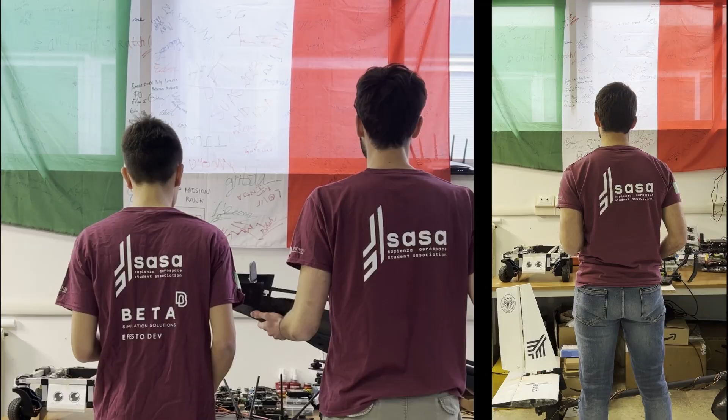Since 2009, Sapienza Flight Team is a student research project supported by University of Rome La Sapienza. This year, the development team counts 35 bachelor and master degree students from various departments of Sapienza University, including aerospace, electrical and control engineering, physics and mathematics, artificial intelligence and management, divided into 6 divisions.

The team started a long-term project in 2016 focused on the development of a custom-made autopilot, which has led to the publication of various articles and theses. The project aim was to participate in SUAS using our own autopilot instead of a commercial one. Due to the complexity of this task, during the years the team faced various technical challenges that never allowed us

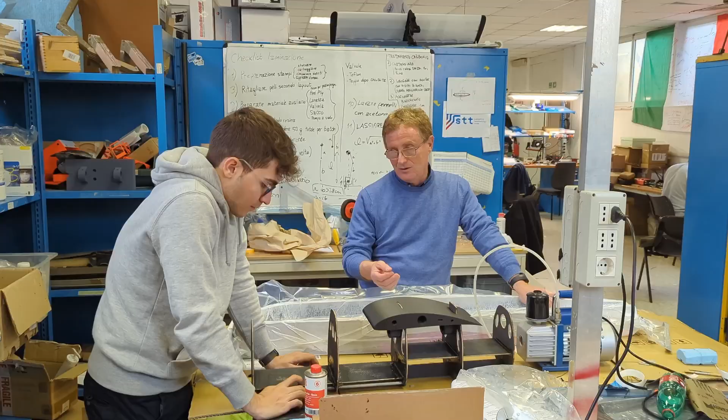to attend the competition. Furthermore, last year during the parachute drop test we experienced a major crash in March that destroyed our only aircraft. We were on the verge of giving up, since we couldn't test and fine-tune the autopilot and computer vision system, but we managed to build a new aircraft in the shortest time.

Afterwards, we spent an immense amount of time at the airfield, conducting extensive flight tests almost every day for a month and a half. This deepened our understanding of the entire system and allowed us to achieve our dream to see our autopilot fly for the first time and to bring our aircraft to the 2023 SUAS edition.

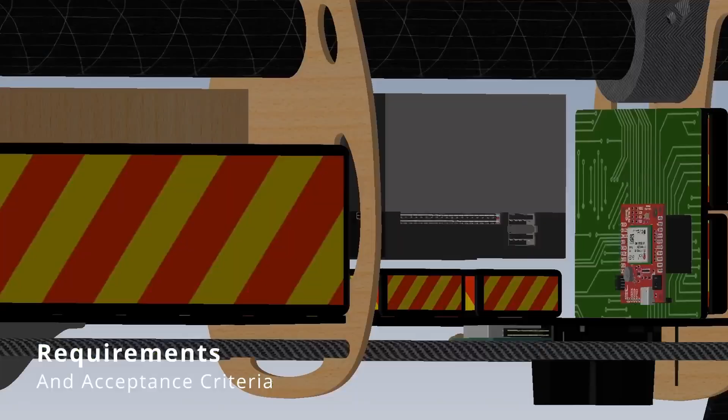P8-NB8 was specifically designed to compete in SUAS 2024. After analyzing this year's rules, we made a strategic decision to drop all 5 bottles in a single flight, in order to optimize our timeline score while maximizing the aircraft's 38 minutes range. P8-NB8 has a flight range of 22 miles at fully loaded weight, which is 32.1 pounds, thanks to two 5S 16,000 mAh lithium battery propulsion packs connected in series.

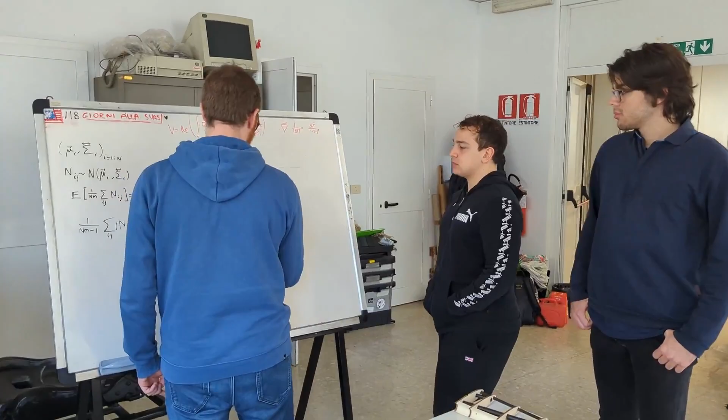It's able to perform agile maneuvers with a turn radius of less than 70 feet at a cruise speed of 48 knots, and to take off and land on a 130 feet runway. The UAV is capable of accomplishing a set of missions by keeping high safety and reliability levels, as well as high-precision autonomous flight. A multidisciplinary optimization approach was necessary to complete the system design, based on time and budget constraints, team experience, workforce, and available means.

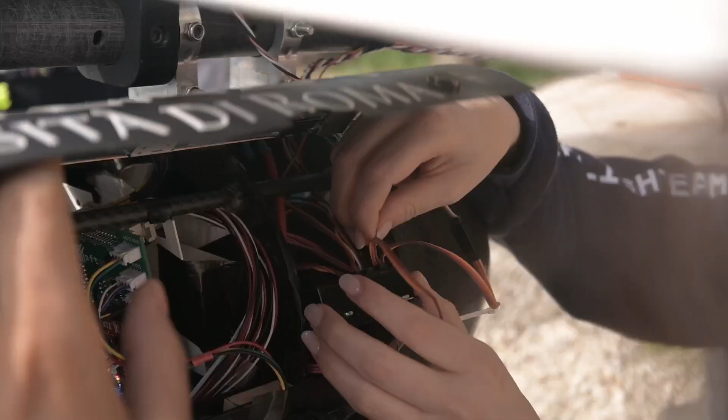After last year's challenging experience, we are raising the bar by refining our design and tackling the weaknesses exposed by last year's inexperience and time constraints. The new aircraft is focused on efficiency and reliability, and we took major focus on refining and working on the reliability of the ODLC hardware and algorithms.

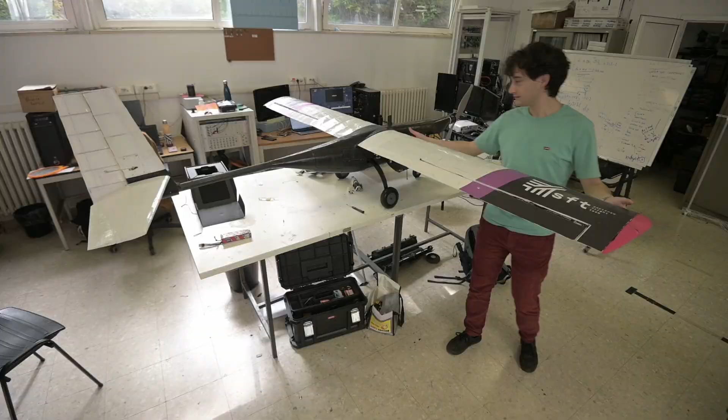P8-NB8 is a high-wing electric propeller engine aircraft, driven by a team-developed autopilot installed on an onboard computer designed and tailored specifically for the team's autopilot. A Jetson computer is used for the AI for the ODLC. A line communication between the autopilot and the AI allows the airdrop mechanism to correctly spot and reach the ground

targets with the payloads. The image acquisition setup is a Basler ace 2 industrial camera with an IMX542 global shutter sensor, which can shoot at 23 fps with 16.1 megapixel resolution with a 60mm non-distortional lens, ensuring high color accuracy. After some trials, we decided to shoot at approximately 120 feet altitude to maximize the capture area and at the same time guarantee the best recognition performance.

Our UAV mounts an NVIDIA Jetson AGX Orin, making the ODLC system run smoothly and efficiently thanks to its 64GB of video memory and powerful GPU. The ODLC process consists of several steps coexisting in a general pipeline coordinating the various processes. Compared to last year, this year's code base was focused on modularity and concurrency.

A number of multiprocessing capabilities and dynamic, object-oriented code practices were used to ensure maximum utilization of our available hardware resources, together with the possibility to hot swap different AI models for quick prototyping. The pipeline is divided into 3 sections. Picture gathering: pictures are captured using proprietary Basler camera software. They are then inserted into multiprocessing queues as NumPy arrays to be consumed by later pipeline sections.

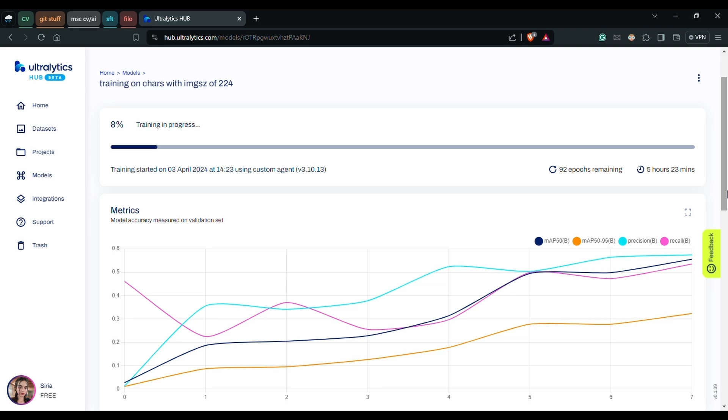An inference system. For the target detection stage, several models were considered, including YOLO-NAS, YOLOv8l, and YOLOv8m. Every model was trained on a train validation test split of the original dataset, including over 40,000 real images shot in different light conditions using both multicopter and the fixed-wing aircraft itself. Another 50,000 images come from a synthetic dataset realized in Blender to reproduce the competition airfield in the closest way possible.

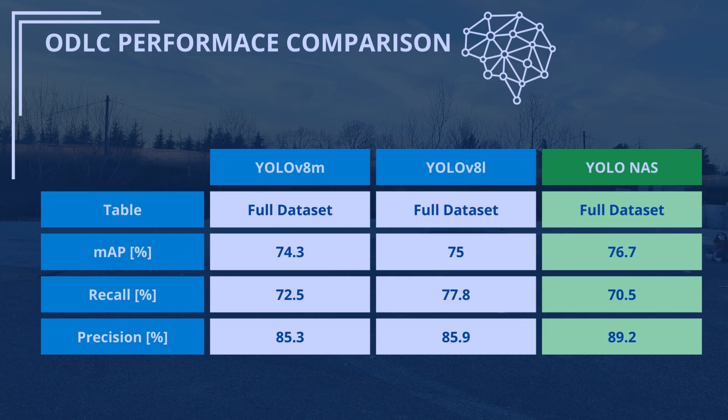YOLO-NAS attempts to detect all features at the same time, while the YOLO-V8 large and medium variants are employed as part of an ensemble of 3 different models. Each one is responsible for the detection of a separate feature: shape, color, and character. Even though it seems less convenient from a computational point of view, this choice actually increases scalability in the model by reducing the number of total classes, resulting in a more dense dataset overall.

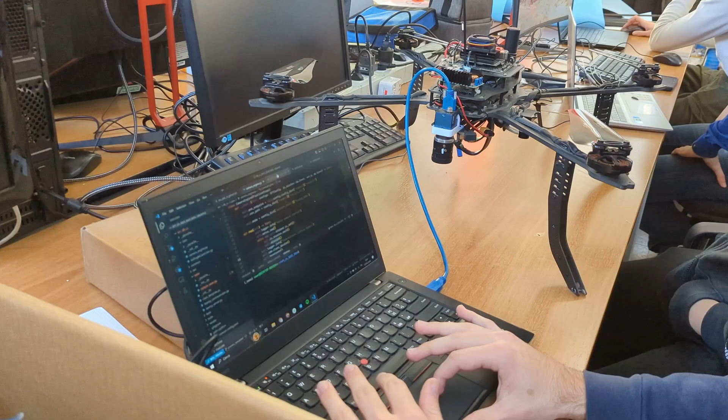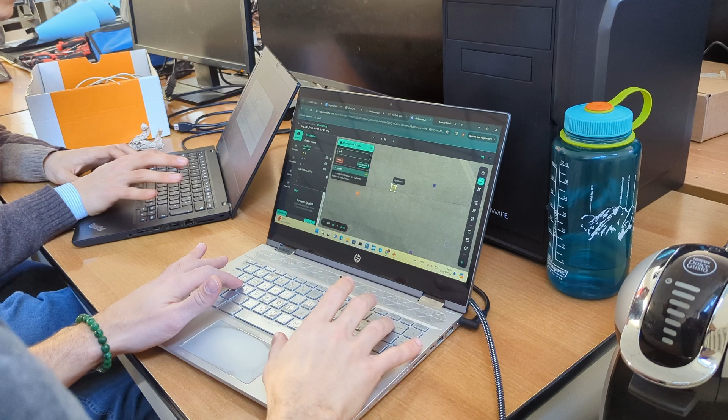Specifically, shapes are detected by YOLO-V8. The resulting patches are then fed to YOLO models for color detection, and to a fine-tuned EfficientNet S classifier for character detection. Decision system observes target recognition. The decision system steps into determining the actual drop locations of the payloads. The confidence level extracted from YOLO combined with information about the flight targets that are communicated at the flight line help the decision system to refine the detected targets into more confident predictions.

Geolocation accurately determines the location of the target by recovering the perspective projection of the aerial photograph. This process requires considering variables such as the position, attitude, and altitude of the UAV and the positions of the camera's focus relative to it. As a result of numerous tests, the team observed that thanks to the chosen optics, lens deformation is not significant compared to measurement errors.

In addition, Geolocation provides estimates of measurement errors, exploiting methodologies such as Monte Carlo and maximum likelihood estimations. These techniques allow us to compare elliptical confidence regions built on each sample of the same target. Tests validate the mathematical model by confirming an empirical error within 16 inches. Thanks to the accuracy and robustness of our system, no additional operators are used for the ODLC tasks. All the process is fully autonomous.

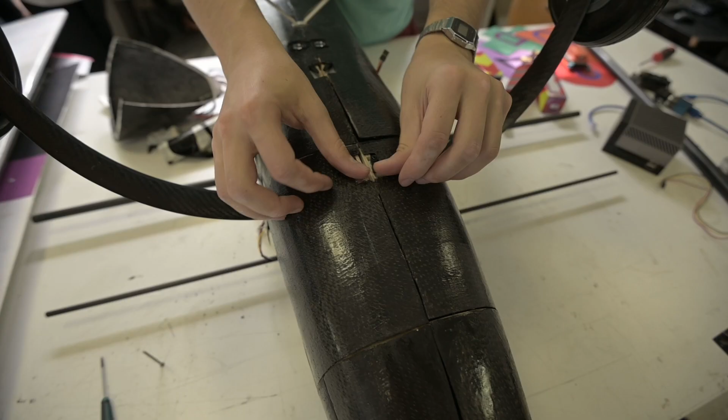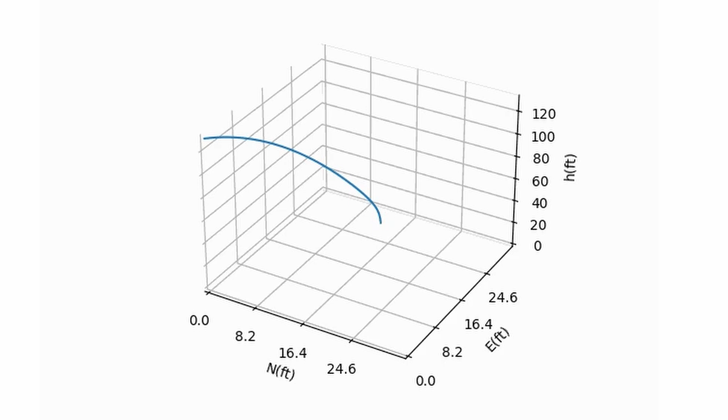The fuselage has been designed to carry on the inside all the 5 payloads in one single flight, and the release mechanism is managed directly by the onboard computer. Dropping point. To ensure accurate payload release, we rely on a 6 degrees of freedom effective mathematical model that integrates lateral and vertical drag coefficients, considering wind and cylindrical symmetry of the payload. The release point is determined by statistical simulations, taking into account the landing error, ensuring maximum accuracy and mission execution.

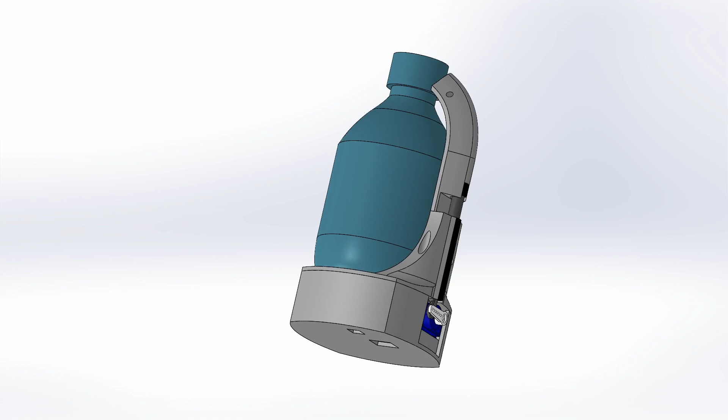The payload. Hardware-wise, the payload system includes a lightweight and easy-to-remove structure that houses the bottle, a safeguard, a latch on the side for the parachute, and compact onboard electronics, which include a barometric sensor and an ATtiny85 microcontroller that manages the parachute release. The chip-run software coordinates the payload through 3 phases: standby, activation, and execution. During the first one, the payload is inside the UAV, and the safeguard is attached to it.

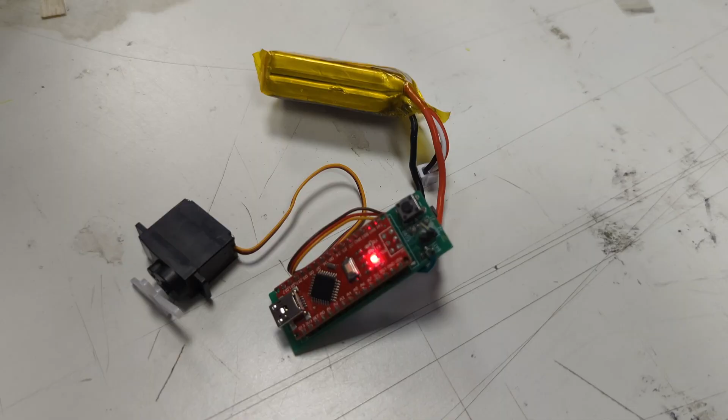When the safeguard is removed using a servo on the aircraft by a command on the autopilot, the ATtiny85 enters the activation phase and monitors the altitude through the barometric sensor. When the predetermined altitude is reached, the microcontroller goes into the execution phase and activates the latch for controlled release of the parachute, ensuring precise and secure control during transport and release of the payload. This mechanism dramatically increases the drop precision with average wind at an altitude of 115 feet. The estimated average landing error is about 23 feet, while releasing the parachute at 15 feet, the error reduces to 12 feet, safely inside the acceptance radius.

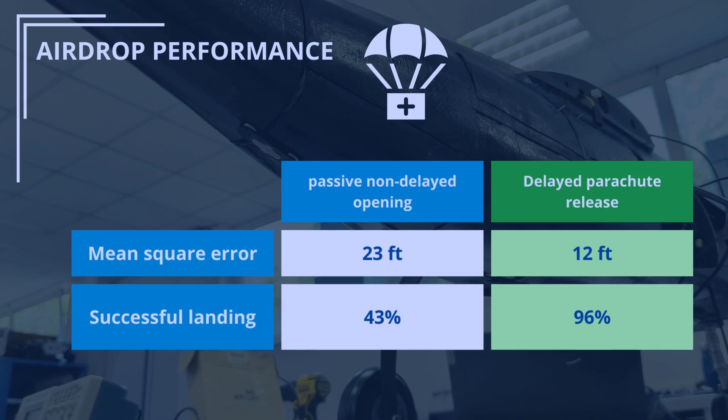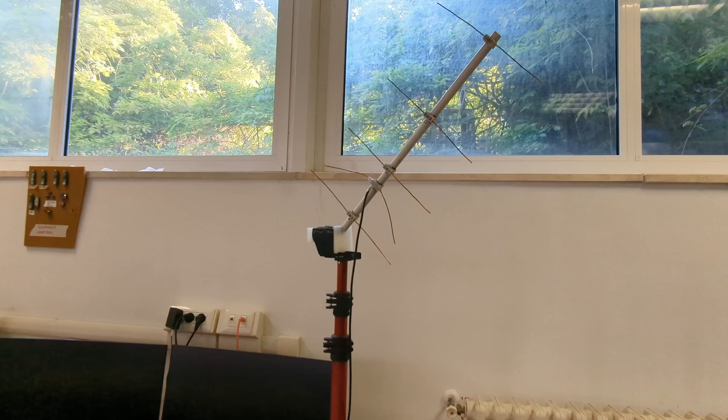The communication system between UAV and ground control station consists of 2 RFD900X US modules with a 3 dBi omnidirectional antenna on the drone and a custom 10 dBi Yagi antenna on the ground, mounted on a fixed tripod near the GCS. For redundancy, there is a second link via Futaba 2.4 GHz S-bus protocol receiver that connects the drone to the remote controller and the GCS, manned by the safety pilot. This is activated in case of critical failures of the autopilot system.

The ground station consists of 1 laptop and a radio modem. Communication with the autopilot is based on the MAVLink protocol. The front-end interface is a modified version of QGroundControl that displays mission plans and boundaries, performs telemetry, and transmits command and control messages.

The use of RFD900X US modules assures a continuous, reliable, and constant data link during the entire length of the mission, tested for twice the competition maximum distance. Furthermore, they are FAA standards compliant. All the tests for the antenna performances were carried out at our airfield in situations similar to those of the competition, with other UAVs flying with various frequencies.

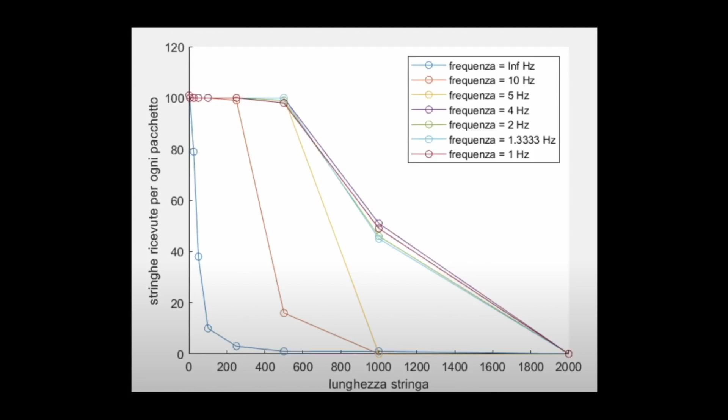The used evaluation metrics are the RSSI, Received Signal Strength Indicator, and the number of received packets. Both of them can be measured using the RFD Tools software. Different trials have been made with different values of data rates, transmitted power, and distances.

Communication to the Jetson during setup time is done through a 2.4 GHz link directly to a computer. In addition, a 2.4 GHz FAA ID sender telemetry is installed on the aircraft to comply with US regulations. In case of emergency, the safety pilot uses a Futaba radio controller, which guarantees seamless and continuous communication.

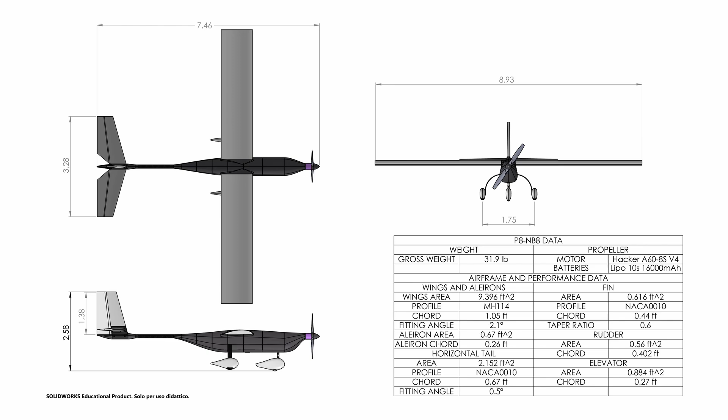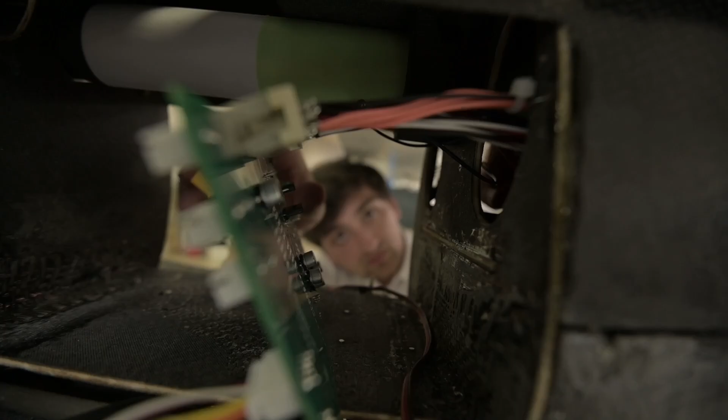Following last year's development and thanks to new rules including smaller bottles, the challenge was to improve the aircraft's performance and maneuverability. The new P8-NB8 aircraft is based on a similar design concept as the previous INEA aircraft, but is equipped with a fuselage made with composite materials, which dramatically increases aerodynamic efficiency and reduces its weight, keeping it spacious at the same time, thanks to careful cable management and better space allocation. In addition, after CFD optimizations, the tailplane has been completely revised.

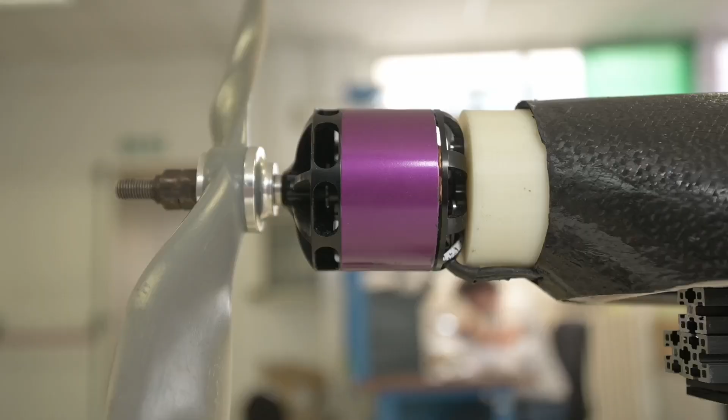P8-NB8 is a fixed-wing aircraft developed along a main carbon fiber boom. This configuration allows agility in disassembling and assembling operations and guarantees good modularity and easy replacement of damaged components. The aircraft is propelled by a Hacker A60 electric motor mounting a 21 by 13 WE APC propeller.

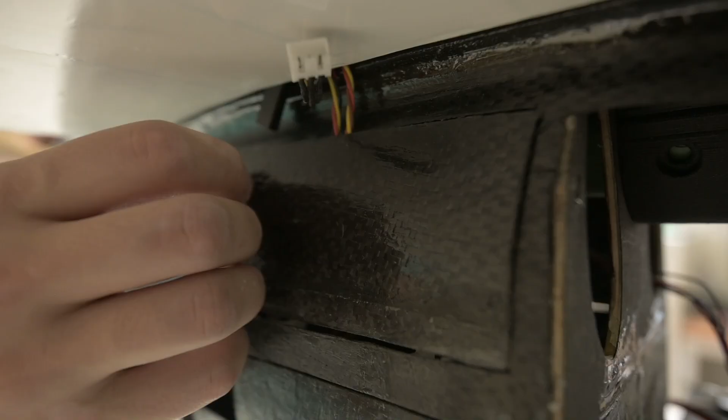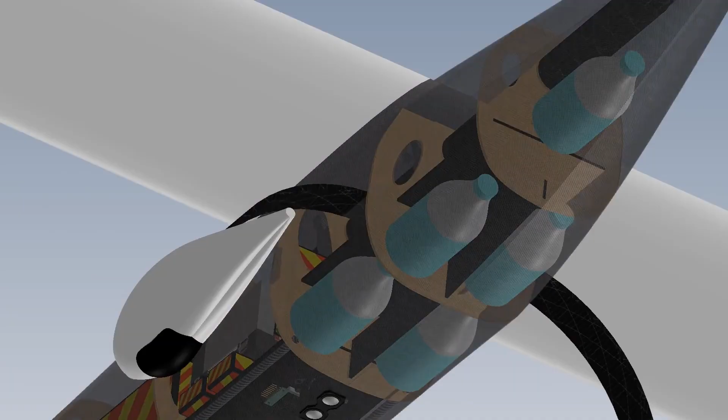The fuselage is designed to maximize space optimization, achieving convenience in accessing electronics for maintenance and quick battery replacement, reducing setup time. The front nosepiece houses the ODLC equipment, while the rear is dedicated to payload release. The undercarriage system is configured with a front wheel and a rear main landing gear in order to implement the autonomous takeoff and landing, since a tail-dragger configuration is too difficult to land by an autopilot.

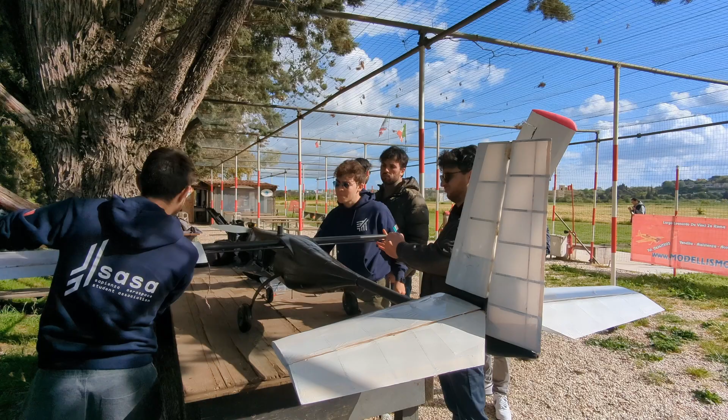To improve aerodynamic performances, the fuselage section area was minimized and the main boom was incorporated inside the fuselage. Wings are attached to the main boom with a bayonet fitting mechanism, and their support is 3D printed using carbon fiber reinforced PA.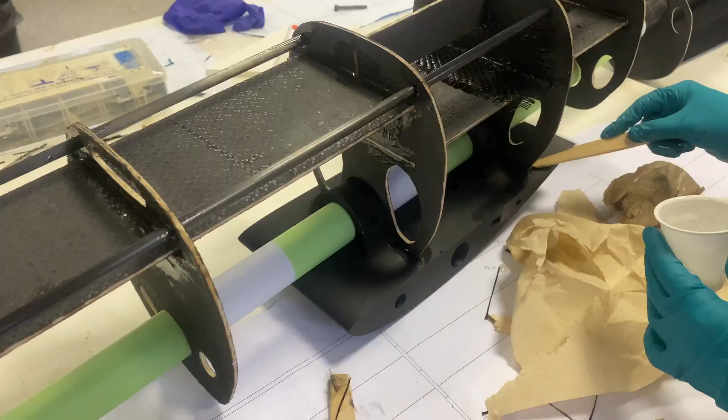The new fuselage design incorporates a telescopic tube as its primary structural element, facilitating easy disassembling by allowing the boom to slide within it. Composite ribs with a plywood core coated in carbon fiber maintain the fuselage in shape, while the fuselage coverage consists of composite material with 2 layers of carbon fiber. The molding process has been carried out using 2 semi-molds created by a resin 3D printer.

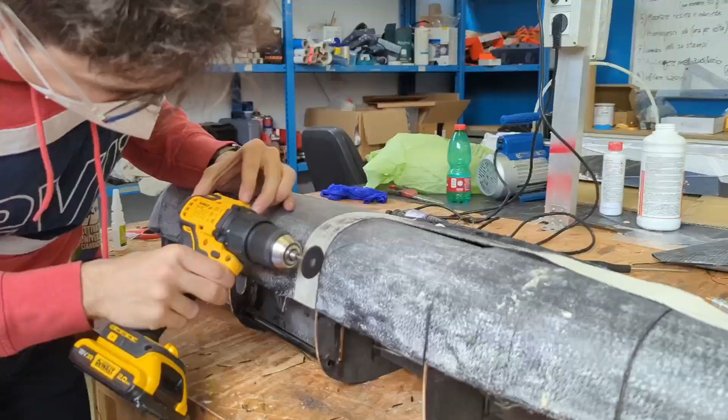Accessibility of this system is ensured through a series of hatches cut into the fuselage, which also allow payload dropping. 5 hatches, each equipped with a servo motor, keep the release bay locked until activated. This allows payload release, after which a spring mechanism closes the bay. Extensive flight testing with strong wind and bearing payloads confirmed good performance, with a 38 minutes autonomy and great robustness, testing the limits by intentionally performing various hard landings, stall tests, and up to 4G maneuvers.

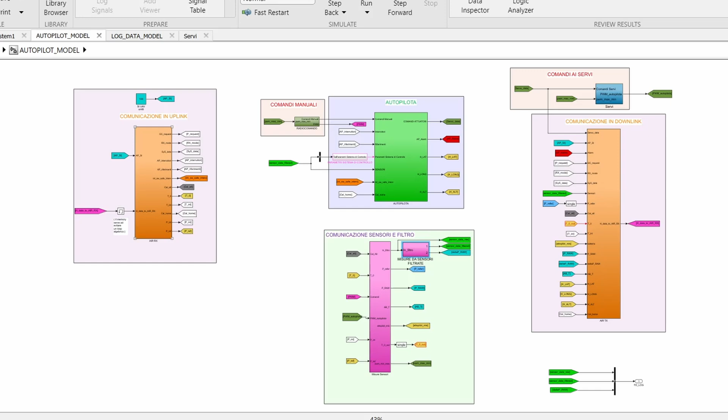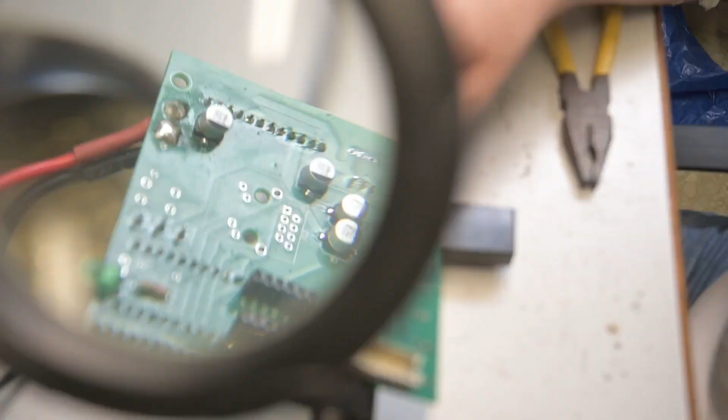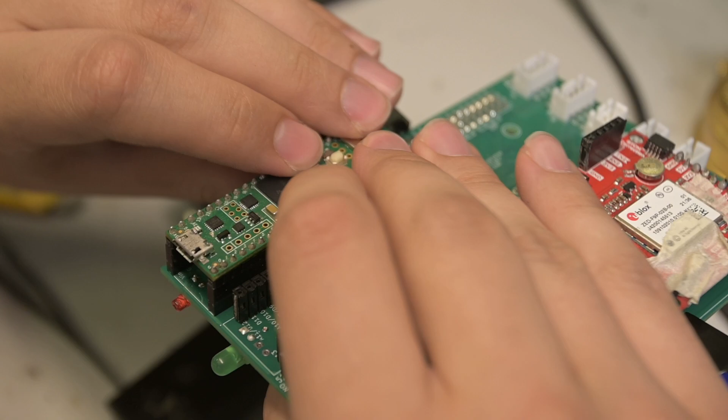The UAV pulsing heart is our in-house developed onboard computer. It's based on a custom PCB that manages the power supply of the OBC, the antennas and all the servos, and holds the communication between the sensors and a Teensy 4.1 microcontroller that runs the autopilot itself and an Arduino Micro that carries out some additional computations from some sensors and sends them to the autopilot itself.

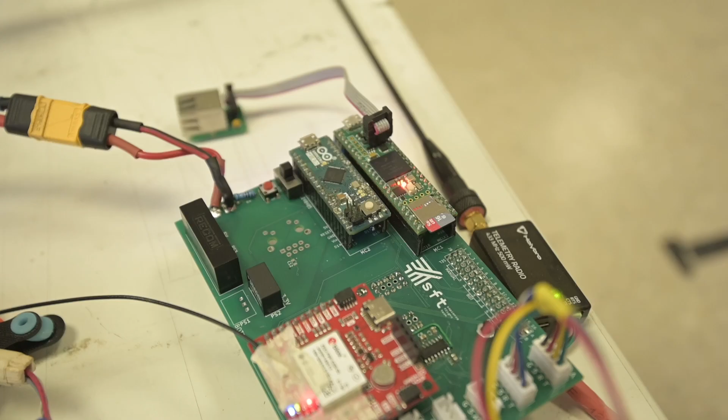The avionics sensors include an Xsens MTi-680G AHRS for attitude, a barometric altimeter, one pitot, an RTK u-blox F9P GPS, a lidar altimeter, and a current sensor to accurately estimate the main motor and avionics battery's state of charge. As every other part of our UAV, the electronics is designed to be fully modular and compact, ensuring fast and straightforward maintenance.

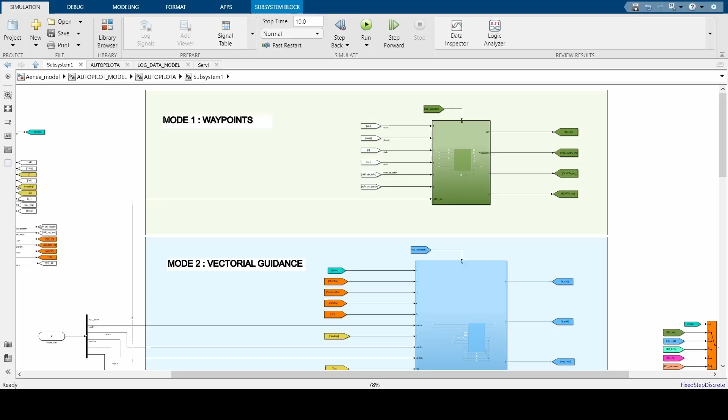Flight management system includes 5 flight modes. Among these, the vector guidance is the primary testing mode used to tune the control loops. The waypoint navigation mode is based on an advanced trajectory generation and path following algorithm. It generates an optimal trajectory taking into account aircraft performances and geofence limits, updating the flight path in real time in case of obstacles detection.

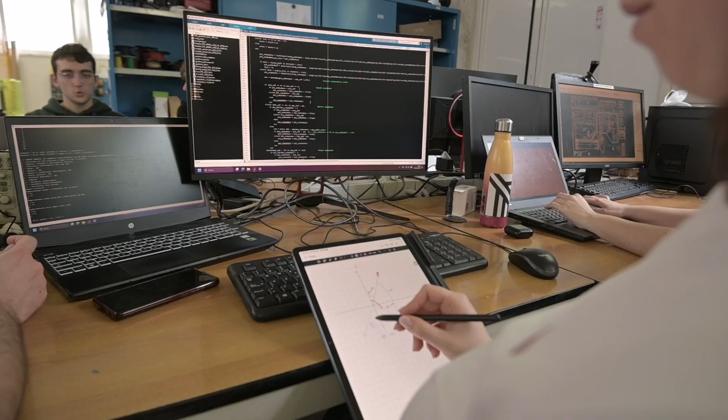The autopilot is also able to perform the automatic takeoff and landing phases. Furthermore, waypoint navigation has been integrated with other modes required in critical conditions, like return to land and flight termination. The activation logic of these modes is signal and battery dependent. Once engaged, the RTL mode leads the drone to the selected position, then switches to automatic or manual landing.

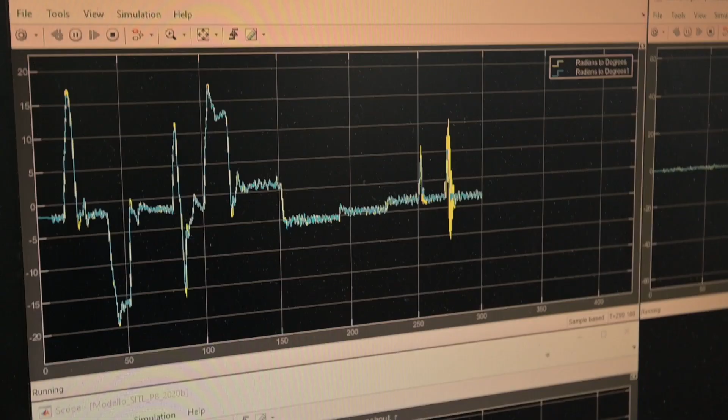The flight termination mode forces the aircraft in the following setup: throttle closed, full up elevator, full right rudder, full right aileron. Tuning. Numerous modifications have been made to make the aircraft's control system more robust, accurate and reactive than last year.

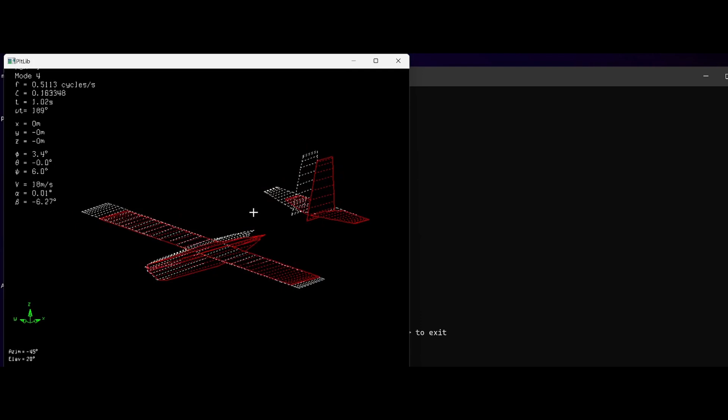To tune and safely test the autopilot control loops and modes, a parallel Simulink model dedicated to the software-in-the-loop simulation was developed. It is a complete digital twin of the aircraft that allows the simulation of sensors outputs, including noise, the rotation of the aerodynamic control surfaces, and dynamic behavior of the UAV. It exploits a sophisticated mathematical model of the aircraft obtained through Athena Vortex Lattice software and validated with several flight tests. The flight control system tuning has been validated through vectorial guidance data obtained through test flights and simulations.

In addition, software-in-the-loop simulations of waypoint navigation have been run to tune the navigation parameters in order to improve the accuracy when reaching waypoints. Real-life testing of the autopilot was conducted by performing waypoint navigations. Missions were planned from ground control stations, streaming the desired waypoint to the onboard computer. These tests have shown that the plane is capable of following an articulated trajectory within a 95% confidence interval of a width of 15.6 feet on every waypoint.

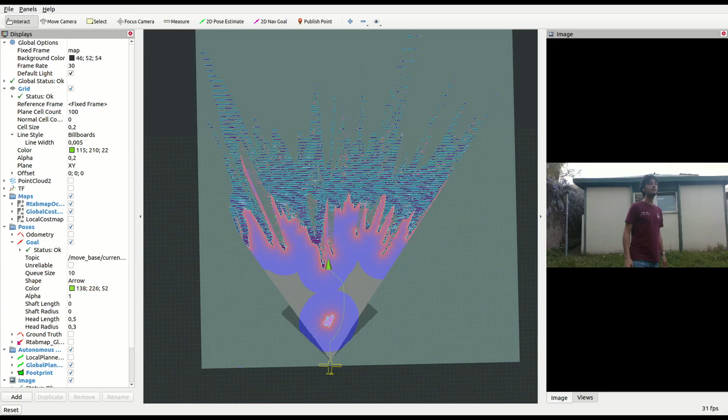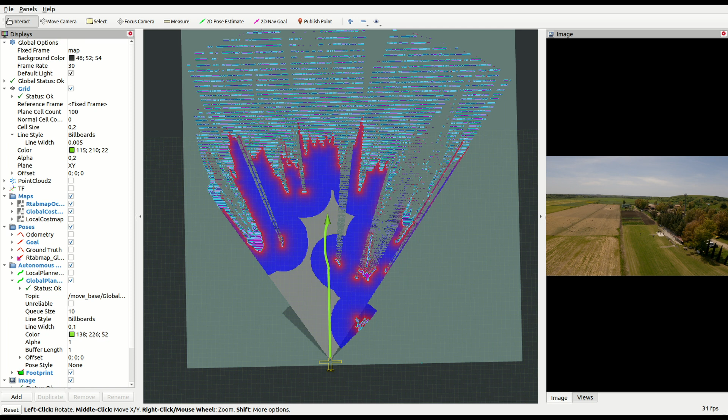In order to avoid collision with other UAVs, obstacle detection is realized through a ZED mini stereo camera connected to the Jetson AGX with a field of view of 82 degrees in front of the aircraft. This allows the identification of long-range objects larger than 15 centimeters with accurate depth perception at high FPS. Thanks to the ROS framework that runs on the Jetson, the stereo camera is capable of generating a high-frequency point cloud through which it is possible to determine the presence of dynamic obstacles and their positions.

Once an object is individuated in flight, a custom algorithm written in Simulink and C computes an alternative path generating 2 new intermediary waypoints, sent through the OBC using Ethernet protocol. The autopilot then performs an evasive maneuver updating its flight path. After software-in-the-loop simulation tuning, we are able to optimize the maneuver and achieve good stability.

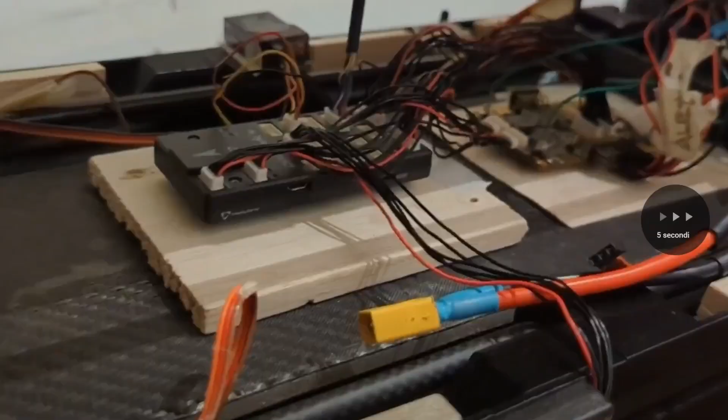We attempted 9 obstacle avoidance maneuvers in many conditions during flights by positioning a slow-moving quadricopter in front of the aircraft path, simulating a competition scenario. In all of them, the aircraft was able to avoid collision by staying at a minimum distance of 15 feet from the UAV. In case of a potential collision with other UAV approaching from a direction other than the front of the plane, the safety pilot is always ready to steer the aircraft away from dangerous situations.

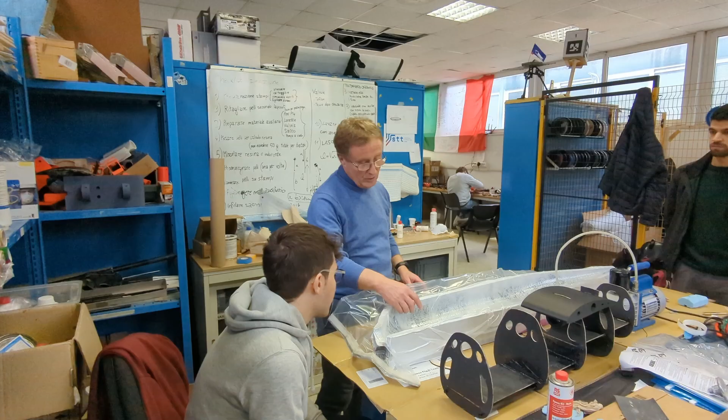The possibility of using Pixhawk and ArduPilot as an alternative to the team's one was considered and tested. Despite the convenience of a commercial autopilot, a custom one tailored specifically for P8-NB8 assures high versatility in accordance with aircraft's performance and mission requirements, allowing at the same time possible software expansions in the future. Furthermore, its extreme modularity makes repair cheaper. Beyond the valuable learning experience for our students, this project could serve as a springboard for future development of our system, potentially leading to commercial production.

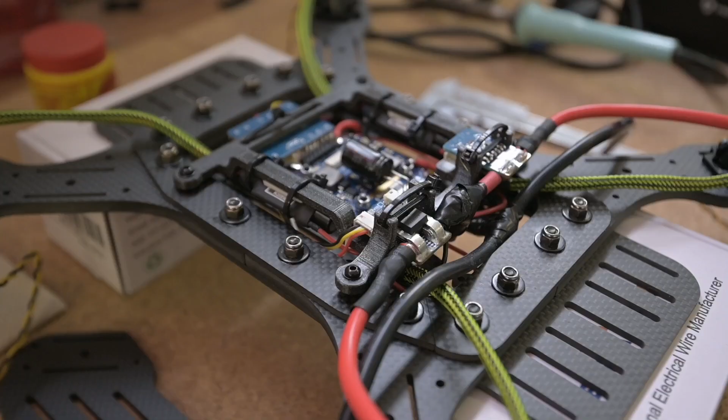Regarding the UAV design choice, a multi-rotor configuration was taken into consideration and tested due to its capability of delivering payload while hovering. However, we ultimately chose a fixed-wing design because of its several advantages, including longer range, faster travel times, and increased loading capabilities.

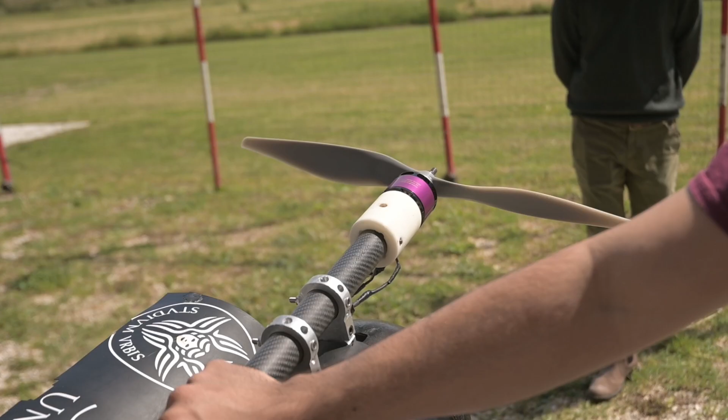These advantages make it easier to meet mission time constraints and open doors for future development of long-range air delivery capabilities, similar to those employed by many air delivery companies. We opted to discard the use of a 2-axis gimbal after testing revealed minimal impact of airplane roll on photo distortion, motion blur, and captured area, allowing us to reduce weight and to simplify geolocation by exploiting the more precise attitude data from the aircraft's AHRS.

Regarding the airdrop system, we explored various concepts, ultimately selecting a delayed parachute airdrop system. The precision of a passive approach of a normal parachute was found to be strongly susceptible to wind gusts, not guaranteeing a stable drop location precision.

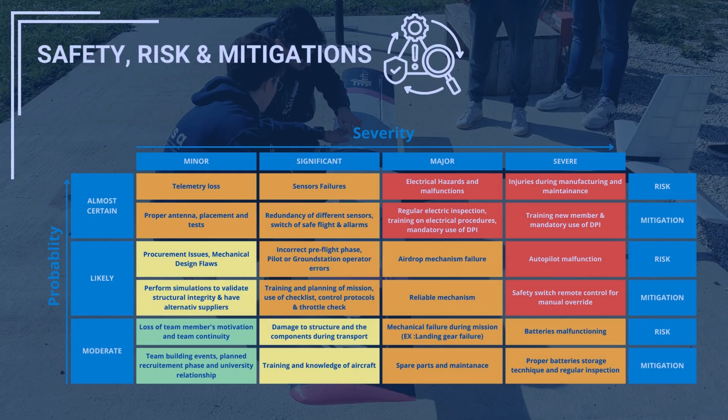We divided risks in 4 different categories based on the phase of the year: development, manufacturing, test phase, and competition. Development. To minimize the complexity of such a project, we worked on a comprehensive management plan that outlines clear milestones, identifies potential delays, and outlines contingency plans to mitigate them. We also implemented a robust plan to ensure timely acquisition of all necessary materials.

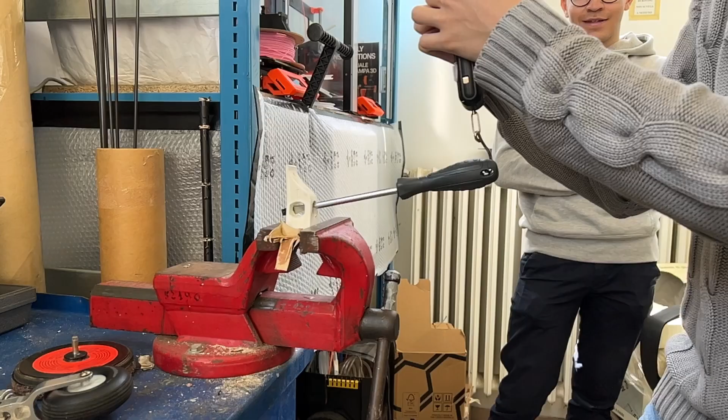The entire project is in fact focused on modularity on many different levels to ensure great flexibility and reduce costs. Moreover, having 2 similar aircraft as a backup this year allowed us to maximize testing campaigns of the various departments and stress test all components. Manufacturing. To minimize or eliminate risks for team members and vehicle components, several safety measures have been put in place, and all team members have been provided with safety courses and equipment to minimize injuries during manufacturing processes and tests.

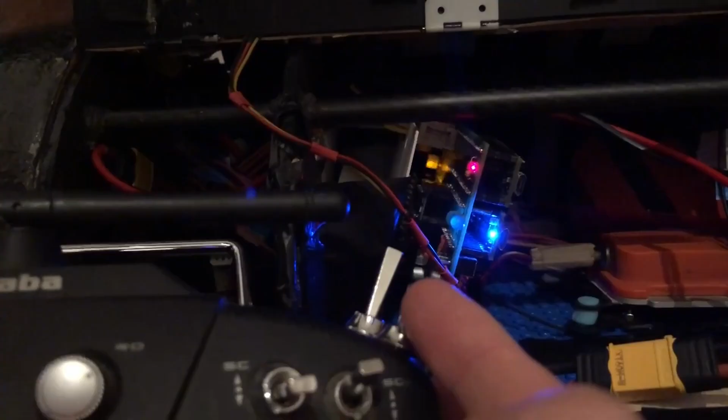Test phase and competition. In addition to the software safety layer measures and switches, the safety pilot is able to completely override all the avionics in case of failure by simply triggering a switch directly on the radio controller, establishing a direct management of the aircraft control surfaces. This is possible thanks to a multiplexer powered by a secondary smaller battery that acts as a hardware switch.

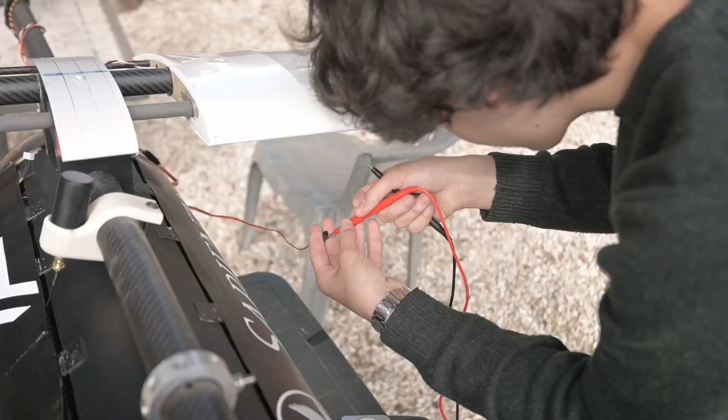Using the experience gained during last year's competition, we worked on the optimization of time and resources spent at the flight line during setup time. It took several trials at our local airfield to fine-tune a strategy by giving each of the 8 members a specific task, simulating competition scenarios and timing our improvement. The defined strategy consists of a short initial debriefing with all the team coordinated by the team captain. The team will then work in parallel.

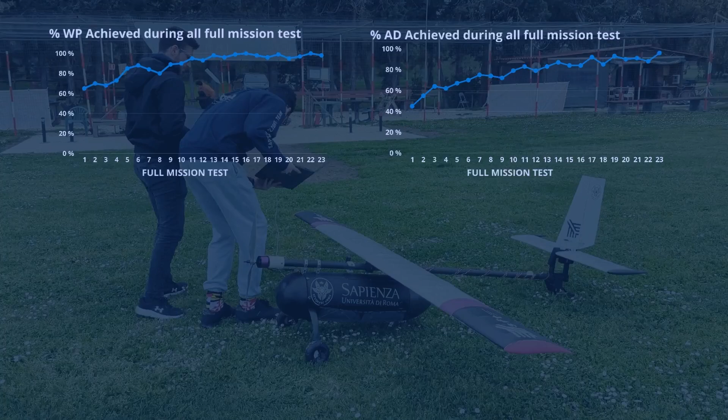2 members help the GCS operator by dictating and double-checking the typed waypoint coordinates given by the judges. Another person is responsible for mounting the payload onto the payload mechanism and placing it inside the fuselage. The safety pilot inspects the functionalities of each part of the aircraft by scrolling a checklist with another member. 2 other ODLC specialists are also working on pushing the acquired airdrop information by connecting via wireless communication to the

Jetson. The team captain is responsible for timing, coordinating, and ensuring that all operations are carried out correctly. He also provides assistance to struggling departments if needed and mediates with the judges. We plan to use 0 additional operators, since we are confident we have achieved great autonomous performances in all tasks, and that our mission simulations improved from time to time with reassuring total scores considering the regulations.

Here it is, our proof of flight showing the capabilities of our aircraft. Manual takeoff. Manual flight. Reaching 1,000 feet from safety pilot as shown in the telemetry. Manual landing.

Manual takeoff. Getting over 200 feet and transitioning to autonomous waypoint flight. Transition to manual and landing approach.